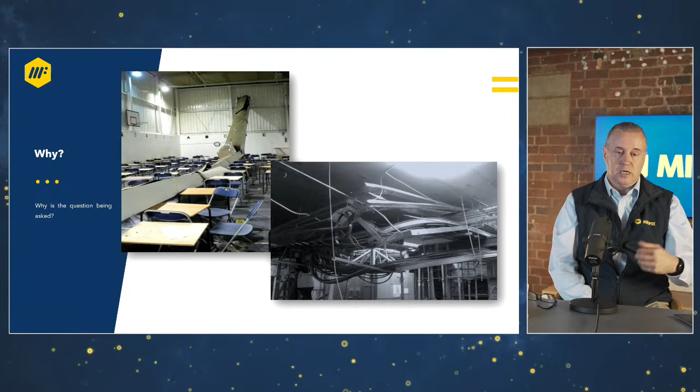There's a couple of images on the screen there that most of you would have seen before. There's a school hall with a ductwork collapse, a roofing collapse failure. Unfortunately, the image on the screen now was the Boston Big Dig. Following this particular incident in the States, anybody installing a resin had to be certified to install that resin.

And we've started with the fixings for one particular good reason. Usually, the fixing in a support and bracketry is your weakest point. It's the interface between the load and the substrate. And it's the fixing, as stated, that is usually the weakest point. So we're going to start with a fixing. How do we evidence that the fixing we've just installed can take the service load?

Well, thankfully, there is an answer for this, and it is under BS 8539. It came out in 2012. It covers many stakeholders. It covers people from the manufacturer of the anchor, the suppliers, the contractors, the installers, and the testers. We all have a part to play and some due diligence within the standards.

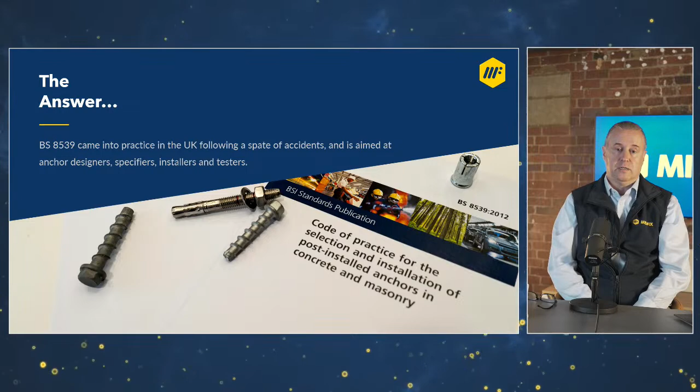There is also the TR50 document published by BESA, the Building Engineering Services Association. It's an excellent document and it breaks down BS 8539 into an easier to manage, sizable document. It also covers best practice for bracketry as well, because clearly the bracketry that is connected to the anchor is carrying the same service load. So that needs to be evidenced as well.

We've broken down BS 8539 into 4 hopefully manageable sections, because the one thing we need to do in our industry is keep things as simple as possible. The more complex we make a subject, the less chance of that actually being put through to the sites and actually working. So we've broken it down to 4 key areas. The selection process. How do we supply the anchor and the bracketry to site? The installation, and finally, if testing is required, how do we go about testing that particular fixing? So we're going to start with the selection process.

If I can start just by highlighting, traditionally within M&E, the selection process is usually carried out by the individual on site carrying out the install, and they normally fall back on past experience. So they'll look at the application that they've got to install, and then they will typically order anchors that they've always used, knowing that those anchors have never let them down in the past. Unfortunately, that's not a selection process within M&E. If we look at other industries where the selection process is far more stringent, such as the civils, the selection process is done well before the installation process, usually at design.

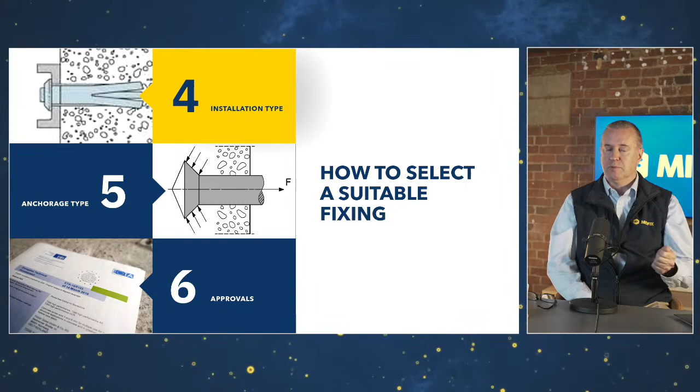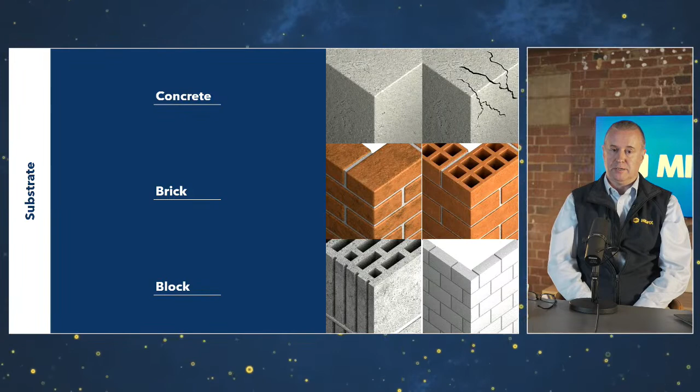So just touching on all of those points, BS 8539 only covers concrete and masonry and block of a certain density. It doesn't cover areas such as timber, steel, if you're looking at composite decking, for instance. But some of the principles within BS 8539 can actually be used to help us and give us guidance in things like cross-laminated timbers. Normally when we are fixing, we will be either fixing into a concrete substrate or a composite decking material.

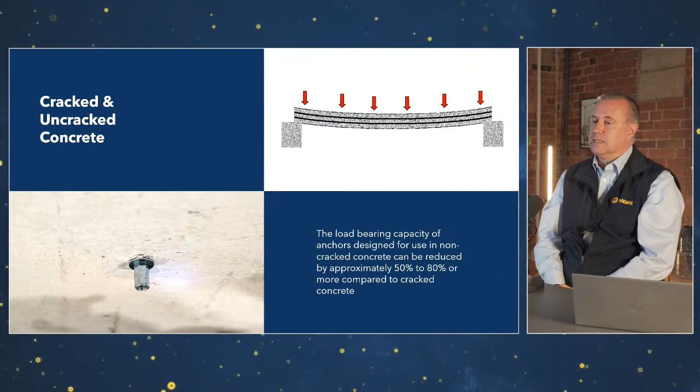But if it's a concrete substrate, the specifier has to understand the difference between cracked concrete and non-cracked concrete. And what does that actually mean? It's a question we always ask on site when we are carrying out some specification work, and usually the answer, is it cracked or non-cracked, is met with a shrug of the shoulders. I've no idea. Normally the structural engineer can tell us, but just to give you a brief as to what cracked concrete is, if we look at the image of the beam, the top of the beam is somebody's floor, underneath the beam somebody's ceiling, and don't forget that is traditionally where a lot of M&E applications will be hung from.

Concrete is a wonderful material. It's very, very good in compression, very poor in tension, hence the need for tension bars or reinforcing bars. But you'll see the beam is trying to deflect. The top of the beam is suffering from compression, not a problem normally in concrete. However, the bottom of the beam is actually in tension, which concrete is not very good at. And that's where you'll find most of the reinforcing bar. So typically if we're fixing up into the ceiling, a lot of the time reinforcing bar is found anywhere between 20 mil and 30 mil, because that's where the concrete is trying to deflect. That's where it's under tension.

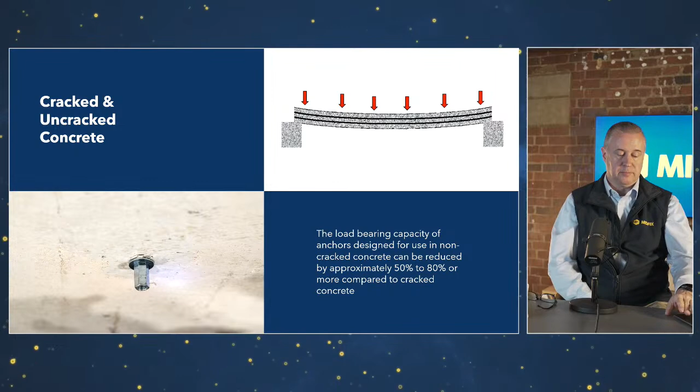That tension zone, it's probably a better term, is a cracked zone. And we have to select the correct anchors for that particular zone. Or should I say, the specifier needs to select the correct anchors for that zone. If we get it wrong and we select or specify an anchor that is not approved for cracked concrete, we could actually be losing up to 80% of the load carrying capacity of that anchor. Really important to remember. If we don't know, BS 8539 actually helps us and says if you can't ascertain whether it's cracked or non-cracked, you assume it's cracked. So we'll always assume the worst case scenario.

So number one, the substrate. We have to understand the substrate. The specifier has to understand the substrate. Number two, the loads. What load are we applying to the anchor? And the load is simply not 2 bits of 25mm copper and a bit of cable tray. It's an applied load, including any dynamics that could be added afterwards, such as cable pulling. We need to understand the loads that we will be applying to the bracketry, which in turn will transmit that load to the anchors. Very important to understand. Is it tension, is it shear, is it combined?

We have to understand that. Again, the specifier has to understand that. The specifier also needs to take into consideration for both anchors and bracketry the environment that they're being asked to work in. Normally, we work in nice dry environments. However, if we remove the walls and we create something like a multi-storey car park, we've changed the environment, and therefore we need to look at the finish of both anchor and support bracketry.

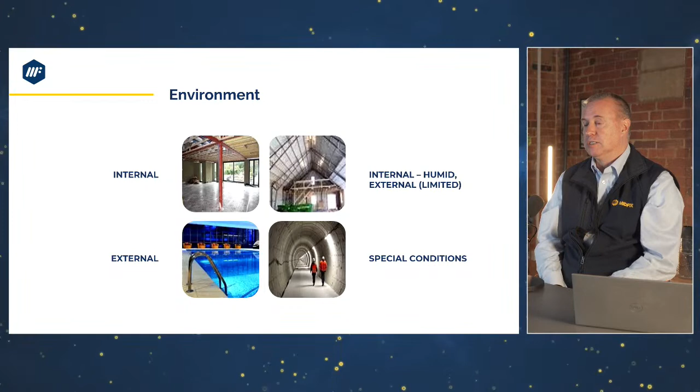There are certain areas like tunnelling and swimming pools. So swimming pools suffer from chlorinated environments, which can be very aggressive to certain finishes. So the specifier needs a strong understanding of the corrosive classifications as to where they are working. The types of installation, this is probably not so important for the specifier, but certainly important and needs to be kept in mind for the installation teams, because they will make the job easier or harder.

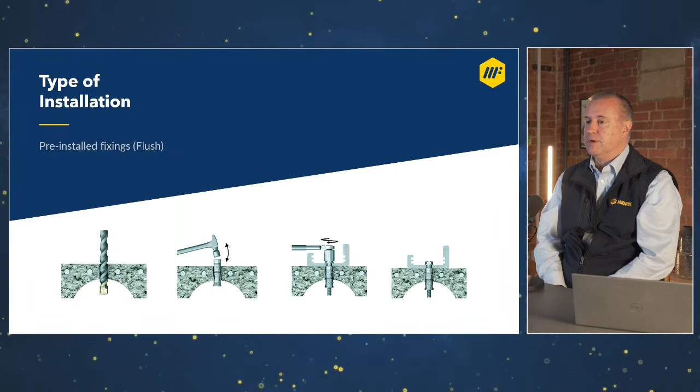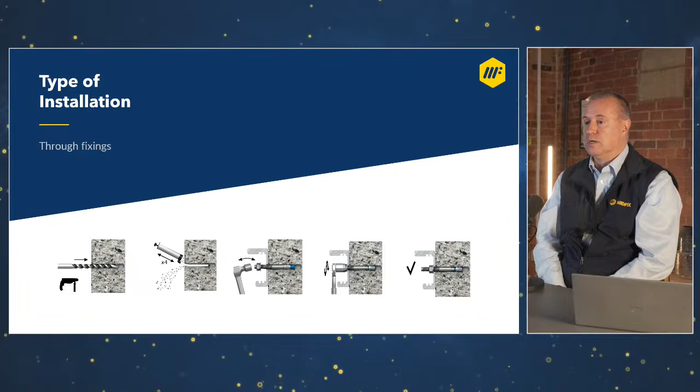The first type is a flush fix. A flush fix anchor is an anchor that needs to be pre-marked, pre-installed, and then the fixture can be offered over the top. It normally takes a little bit longer of an install because there is some setting out to be carried out with this type of anchor. The second type is a through fix anchor. As the name suggests, we can actually fix through the fixture straight into the substrate. And this normally, not all the time, but normally makes for a quicker install because marking out is not as critical. However, really important for the specifier to understand is how the anchor works.

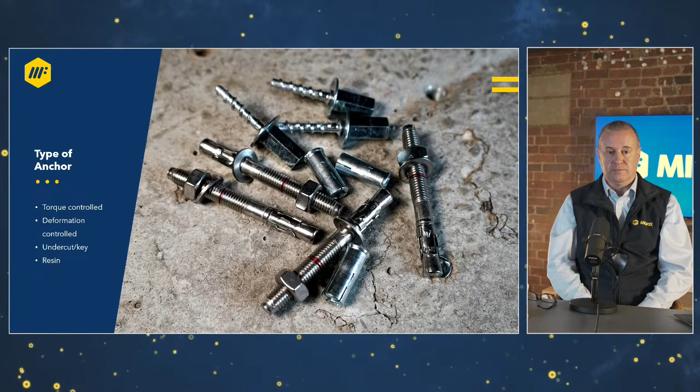All anchors work on either one or a combination of three basic principles. They either work on friction, interlocking or bonding. And those three principles cover all anchor applications. Friction means it's an expanding type of anchor, whether it's a deformation controlled, commonly known as a drop-in or a wedge anchor, or a through bolt, which is a torque controlled expanding anchor. These types of anchors impose a huge stress into the substrate.

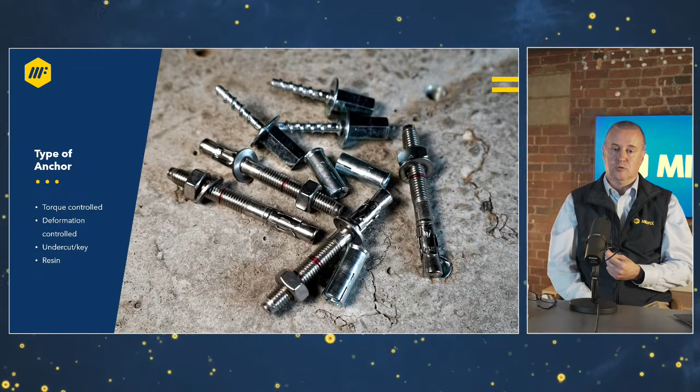Interlocking anchors, such as concrete screws, impose a much lower stress into the substrate. And resins are very similar to interlocking. Some resins work with a combination of bonding and interlocking, but they impose a smaller stress into the substrate. The stresses that we are imposing into the substrate create limitations. It means we can't place anchors very close together if they're a high stress anchor, or near the edge of slabs. Anchors that impose a stress into the substrate, so expanding type anchors, and obviously other types of anchors, create a cone of influence, and we need to be careful that we don't position the anchors too close together.

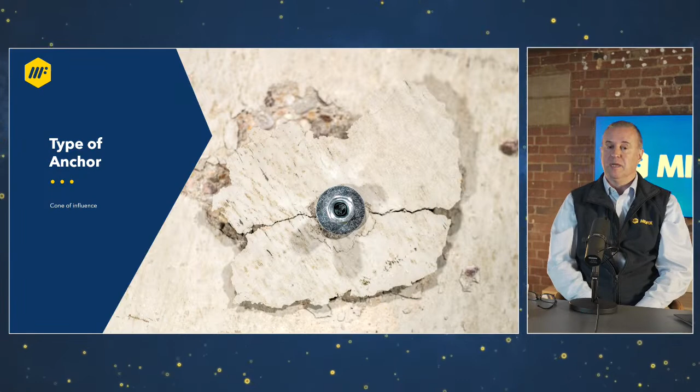If we look at the data sheets, and everything about this is about data, the specifier should have these at hand, it will tell you the minimum distances from each anchor and from the edge. If we go too close, there are reduction factors to be applied by the specifier, and indeed there is a limit as to how close we can go. There's an example on the screen of something that's quite common, which is a breakout failure of that slab. You see this quite often where we have base plates fixed down with through bolts, expanding type anchors, where there's 4 anchors far too close together.

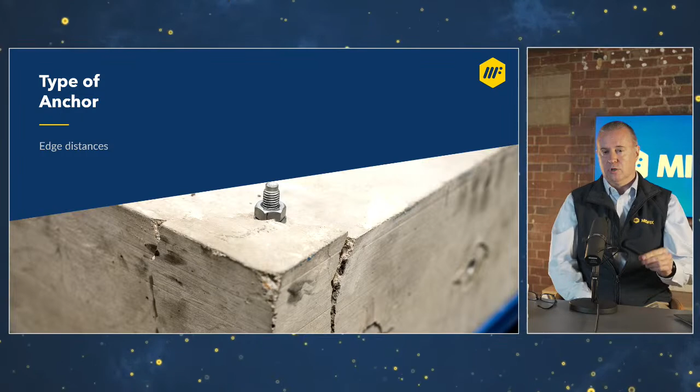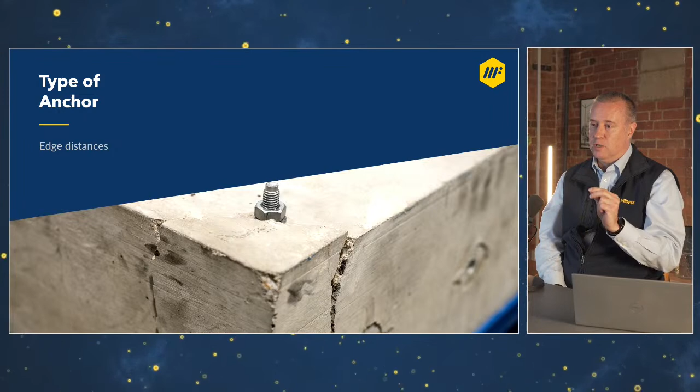The specifier should be looking at stressless types of anchors. They're not truly stressless, they do impose a stress into the substrate, but a concrete screw will put much less stress into the substrate than an expanding type anchor. So the specifier needs to understand the 3 basic principles, interlocking, friction and bonding, how they work and how they affect the substrate, because that will limit which anchor we can use in which application.

The final bit of due diligence that the specifier needs to understand is the approvals. So what does BS 8539 tell us? Well, BS 8539 is quite clear on this. It tells us if an ETA approved anchor is available, it should be used. And an ETA is a European Technical Assessment. It's where the anchor manufacturer sends their anchors away for independent testing, and the testing is carried out to a harmonised set of standards. So we can actually compare like for like when we're looking at different anchor manufacturers.

But for the specifier, the ETA sheet gives us the information required in order for us to understand the resistance that that anchor will give us in a known substrate. Without that information, it makes the specification process, I won't say impossible, but extremely difficult. So BS 8539, very straightforward. If an ETA anchor is available, it should be used.

Now, there is a good reason why there are quite a few non-ETA approved anchors on the marketplace, and it's for commercial reasons, because the ETA process is an extremely expensive process. But without the data that the ETA data sheet gives you, it makes it, as I've said before, extremely hard to specify. So that's crucial. And that ETA data sheet is part of the evidence. So if we look at all the due diligence that's gone on there, that all forms part of the chain to evidence that the anchor is actually fit for purpose.

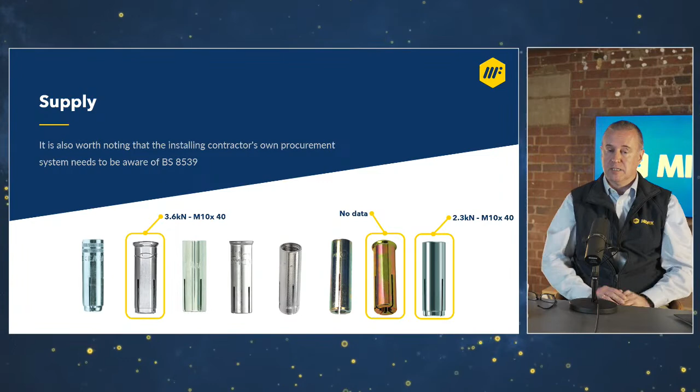But there's 8 on the screen. All 8 have different recommended loads. This actually highlights one area as to why anchors don't collapse on a daily basis. We've painted a very dire picture about anchor failures, but the truth is, yes, anchors themselves don't actually fail, but structures come down, so to say supports come down on a regular basis. It's usually because they have been installed incorrectly.

However, if we look at the anchors that are on the screens, within M&E, our applied loads tend to be quite low. And if you look at the anchor that's highlighted there, one of them has a recommended load in excess of 3 kilonewtons, which is quite a hefty load. Most of our loads won't be anywhere near that. So even if this anchor is selected wrong and installed incorrectly, the chances are the anchor will still take that applied load because the safety factors are huge behind these anchors. 3.6 kilonewtons is a recommended load, not a failure load. The failure load is extremely high. So the anchor will still work.

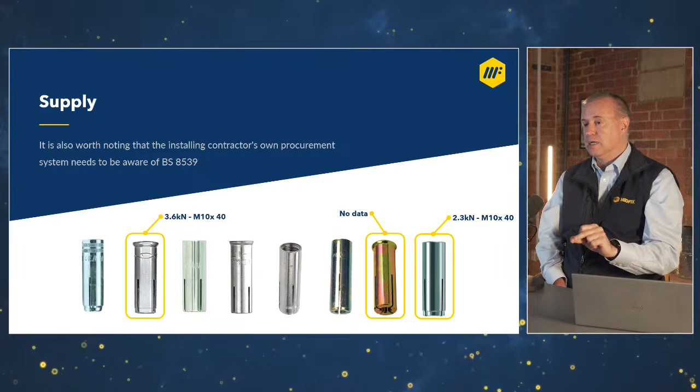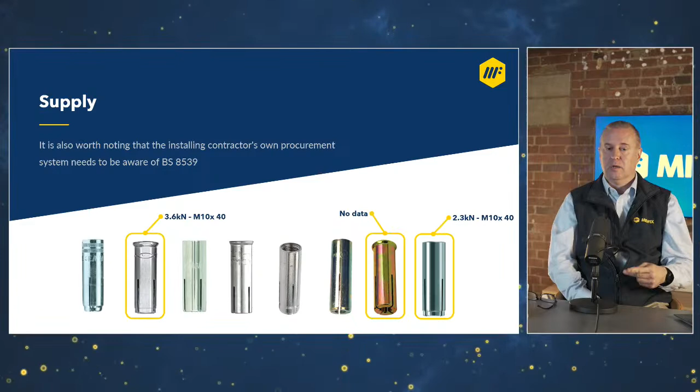But the truth of the fact is, should anything happen, we've broken the specification because we haven't provided the anchor that was specified, it hasn't been installed correctly, and worst of all, if we've changed the anchor that's been specified, we haven't followed the correct change management process. And this is important, again, not because of failure, but because of the ability to prove your install. If we install the anchors that you've specified, if we install them correctly, then we can realise the recommended loads of those anchors. Without proof that the anchor's been selected right and installed right, you won't realise the recommended load of that anchor, which is the proof.

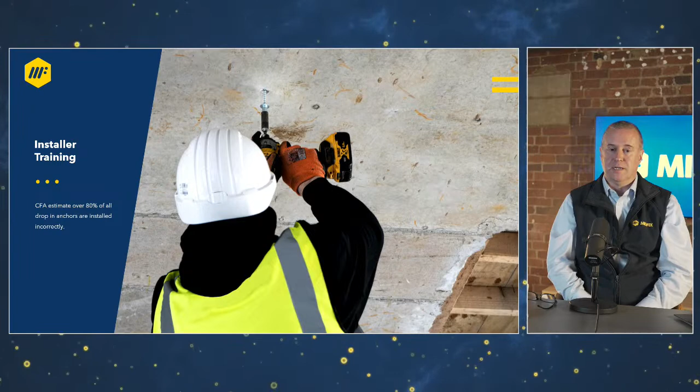The install is the biggest variable in all of this. The installer is 9 times out of 10 the main reason why installations, both anchors and bracketry, actually fail. It's a lack of understanding of the fundamental basics of that particular type of anchor. And BS 8539 again helps us out with this. It's training and a bit more training. There's 2 types of training, installer training and supervisor training.

Installer training, in essence, is the easiest bit. We can capture that in one simple sentence. Install the anchor to the manufacturer's instructions. An ETA approved anchor will have all the information on the box required to install that anchor correctly.

It will give you the drill diameter and depth. It will tell you nine times out of ten to clean the hole out. It will give you the setting tool requirements for that anchor. It will tell you the torque requirements for that anchor. And torque is a really important and critical term here, and we will have a further slide on torque, but just keep it in the back of your mind. And it will also tell you the loads that that particular anchor can take.

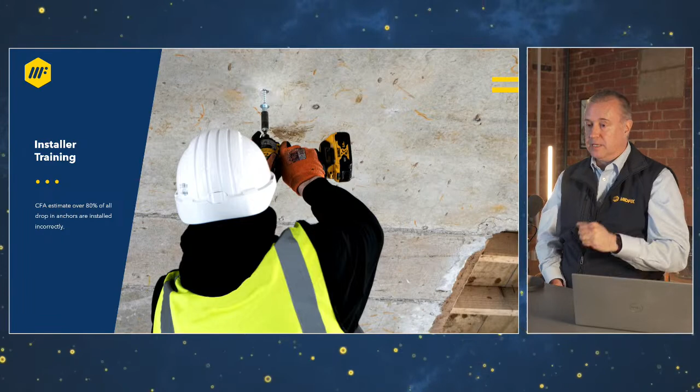But for the installer, the instructions are on the box. The drill diameter and depth as mentioned, how to install the anchor, clean the hole out, the setting tools that are required. It's all on the box. But training is absolutely everything. Now, as a worst case scenario, a toolbox talk is better than nothing. So whichever anchor you've chosen to specify, get your installation teams trained on how to install them.

There's an estimate out there that for drop-in anchors over 80% are actually installed incorrectly. Personally, I think that figure is wrong. It's more like 95% are installed incorrectly for a couple of good reasons. First and foremost, the correct setting tool is not used. Most people will use a generic setting tool. Well, there isn't a generic setting tool for drop-in anchors. They are manufacturer and size dependent.

And the other bit, and again, this is required to be able to evidence and realise the load data, even for a drop-in anchor, on the installation instructions, an ETA approved one will tell you a maximum torque. Well, why do we need a torque for a drop-in anchor when they are controlled by striking a setting tool with a hammer? Well, the torque is there for the set screw or the locking nut that we apply to that anchor, and you'll find it's quite a low torque on most manufacturers' set screws. If we over torque them, in essence what we're doing is we are pulling the anchor out of the substrate, and therefore we're not realising the full load that that anchor can actually take.

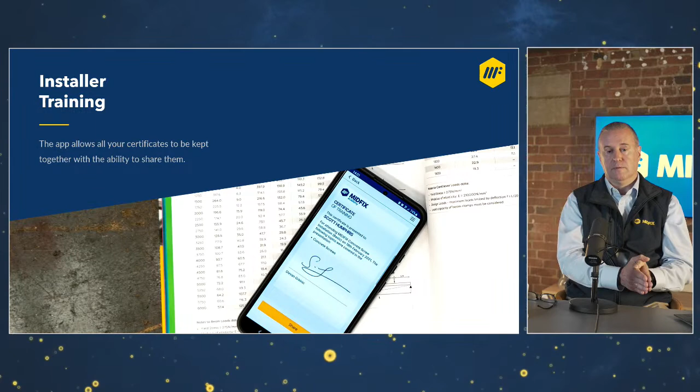Finally, the testing. We often get asked to carry out testing on site. It's normally called a pull test. It's not the correct terminology, but that's how the industry recognises it, as a pull test. BS 8539 actually tells us that if we've installed an ETA approved anchor into a known substrate and it's done under trained supervision, i.e. the supervisor, with trained installers, there is absolutely no need to carry out a proof test.

And that makes quite a lot of sense if you think about it. The anchor has gone through a very expensive and rigorous ETA process. There is no way that that testing process can be replicated on site. So a proof test isn't required, but normally one of those elements is missing. Either the training competencies of the installation teams or the supervisor. The substrate might be unknown as well. If we don't know the design strength, then we have to carry out testing.

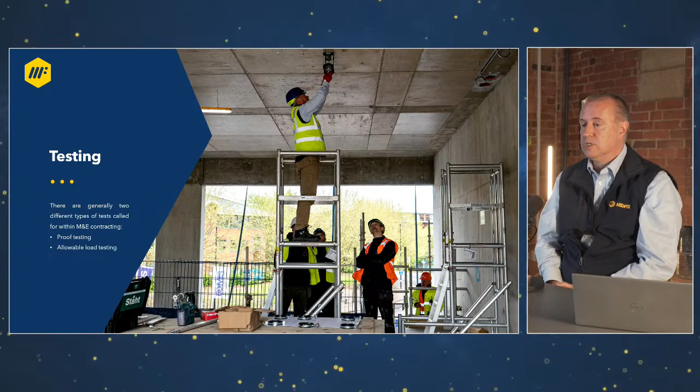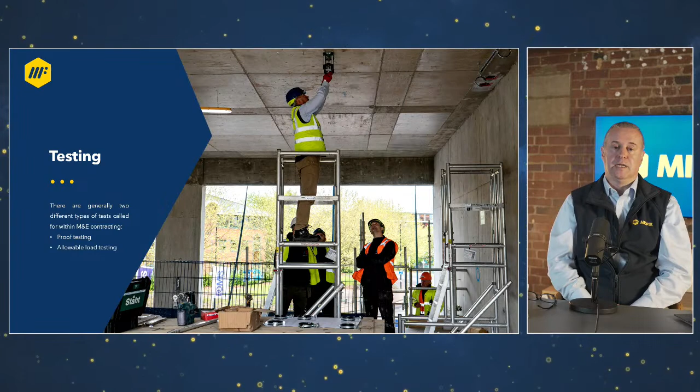But there's 2 types of testing. There's a proof test, which is probably the most common type of testing. This is when we attend site to anchors that are already installed and we just prove their installation. That's all it does. It proves it's been installed and it reaches a test load. It doesn't actually tell us that the anchor's been selected correctly in the first place, but it does prove it's been installed and it does reach a test load.

Normally that test load is only 1.5 times a recommended load, and there's a reason for that. It's because that anchor is being left in service. If we go above the design load, then we need to remove that anchor from service. But a proof test is just a test that proves this anchor in this particular application has been installed correctly.

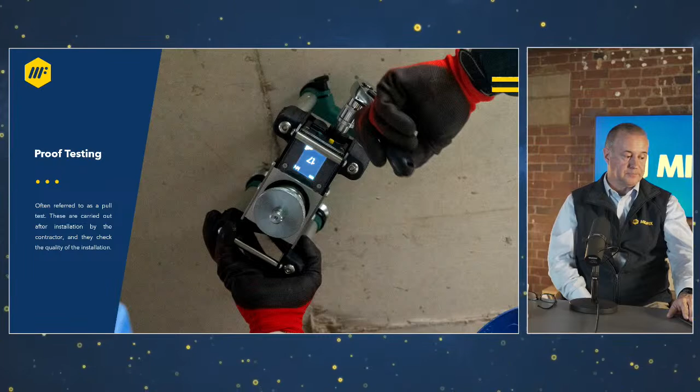If there's an element of the ETA that's missing, then we need to carry out allowable load testing. Just move on to that one. Allowable load testing is a little bit more rigorous. It requires a different type of card for the operator to carry. One thing to bear in mind, anybody carrying out testing for you or on your behalf needs to hold a CFA, Construction Fixings Association, tester card. A general card is required for proof testing, and an advanced card is required for allowable load testing.

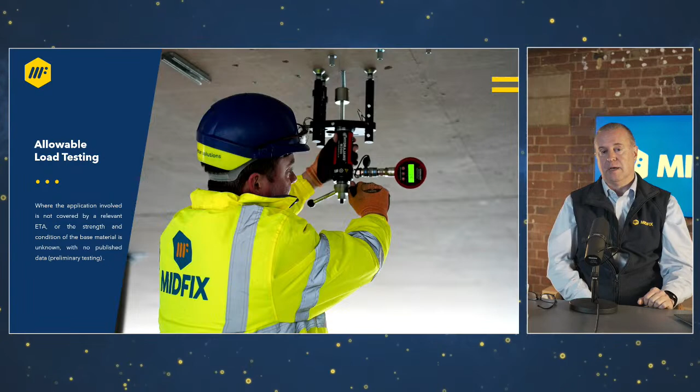But allowable load testing is only specific for that particular site, that particular fixing. It's usually for when we have an element of the ETA missing, such as it's an old building and we don't know the design strength. We then carry out allowable load testing to find out the suitability of that anchor in that application only. Whereas an ETA in a known substrate can be transferred from site to site, allowable load testing is fixed on that particular application. And if the substrates vary, we may have to carry out more than 1 or 2 allowable load tests.

So that's testing. We've broken it down, BS 8539, into the selection process. Don't forget, whoever makes that selection is the specifier, and they're the first port of call should something go wrong. The supply of that, and a lot of the times, whoever's changing that supply, for whatever reason, could be commercial, it could be availability, they become the specifier if they change that anchor.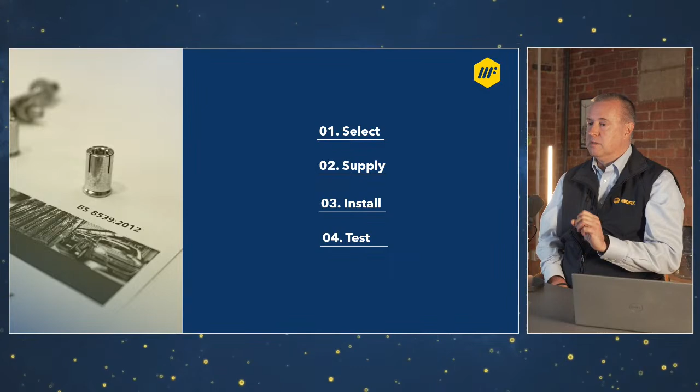The install, the biggest variable, that's where it's going to go wrong. That's where issues occur. Anchors themselves very, very rarely fail. Things come down a lot of the time because they've been installed incorrectly, or they were selected wrong in the first place, which means they're not given the opportunity to perform. But the vast majority of the time, they've not been installed correctly.

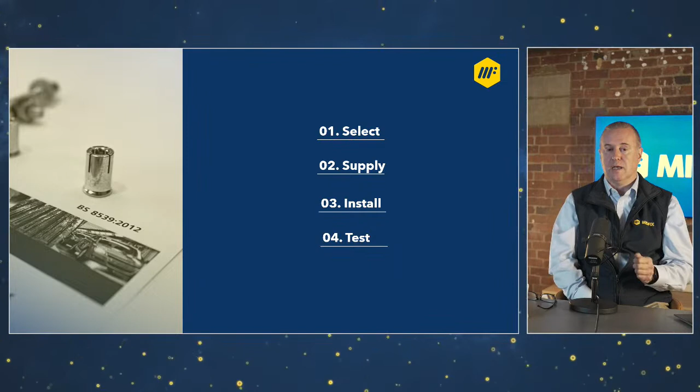And some of that is down to the value we place behind anchors. Because they are a commodity item, there's not much thought gone into it. If there's not much thought gone into the selection process, it usually means there's very little, if any, thought in the installation process. But anchors are installation critical. And finally, the testing. Just bear the testing in mind. Proof testing only tells you that that anchor has been installed correctly. It doesn't tell you anything else.

We then need to apply the same principles to the bracketry that's under the anchor, that the anchor's supporting, because the bracketry is carrying the same load that it's actually transferring to the anchor. And how do we carry out this proof? How do we evidence that the bracket is capable of taking that same service load? Well, that's to use a tested channel system.

But this is only one point. If the channel can take a load, let's say a worst case point load of 100 kilos, we need to understand that any joint connection can also take that load or more. So a tested system is critical. When we procure channel from just a channel supplier, 9 times out of 10 we are given a load table with that as well. But the channel itself, the load bearer, is tested as a simple beam. So the maximum deflection they give you is tested on 2 rollers with a deflection applied. It's not tested with any form of connection.

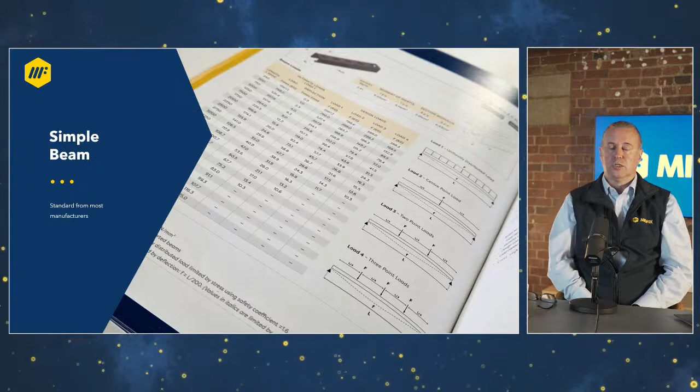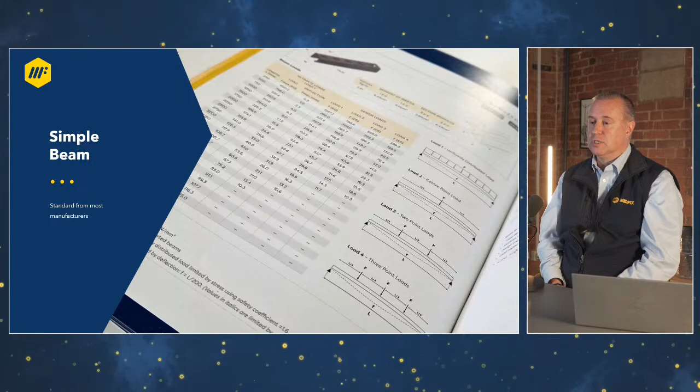As soon as we've connected to that piece of channel with either a channel-to-channel connection or a threaded rod connection, that load data is lost. And it's quite clear why. The manufacturers of that channel cannot possibly test for all end applications. And this is where a tested channel system comes into its own, because the connections are actually provable as well.

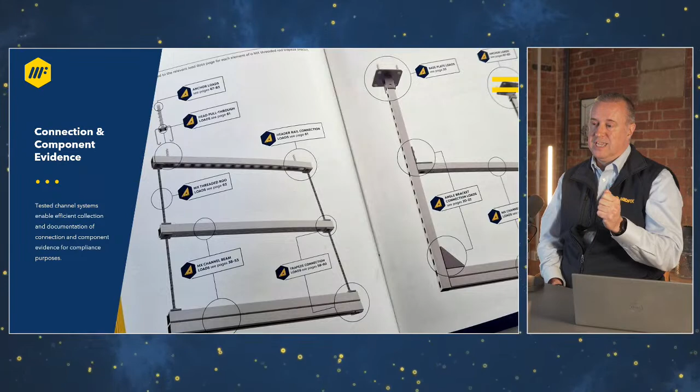So if we look at the image now, typically a lot of the time we work with trapeze brackets to carry the services around buildings, whether that's on threaded rod or channel. And obviously the channel trapeze there, if you invert that, you've got a goalpost. The same rules apply. But every connection on that trapeze needs to be provable. That's including the tensile load on the threaded rod. The threaded rod connection to the channel needs to be provable as well. Otherwise, the load data for the actual channel itself is null and void.

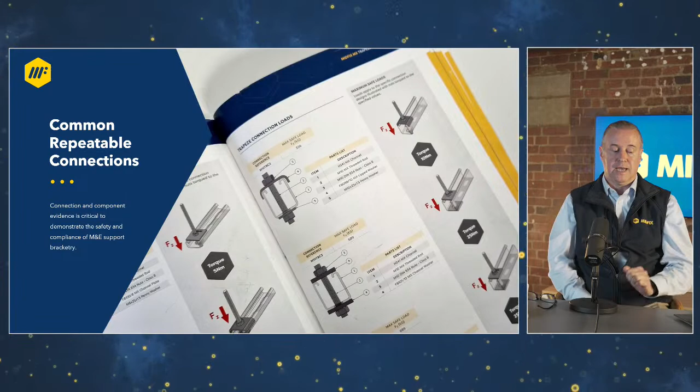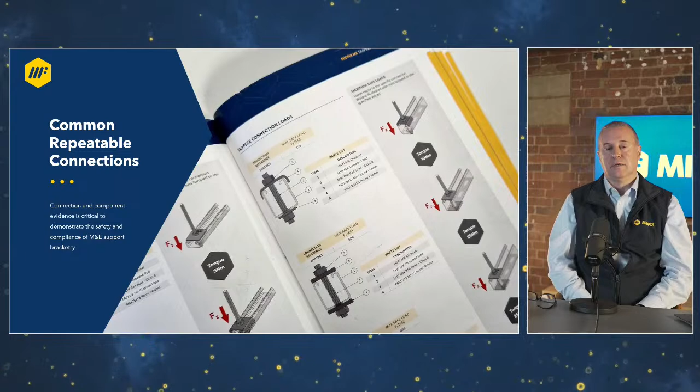That joint has to be repeatable. In order to do that, it's got to be built correctly. In order to do that, it needs an installer with a torque wrench to build it as per the manufacturer's instructions, and that will release the load and the warranty. But the training behind it is as critical as the training behind the anchors. You've selected a tested channel system. Don't miss out training the installers. That's your final piece of the jigsaw. That closes the circle and proves that you've used the tested channel system, which means you can evidence the load. And finally, they've been installed by people who are aware of how to make that connection.

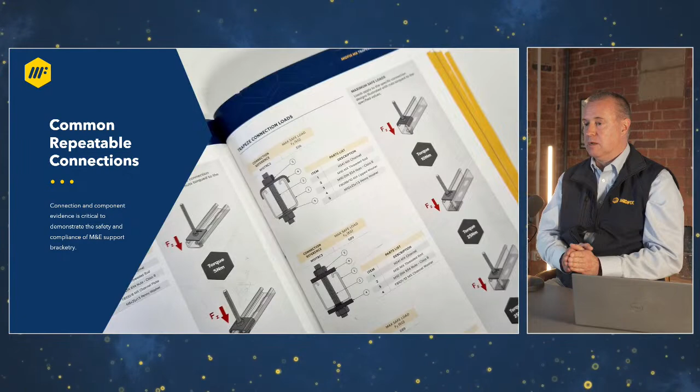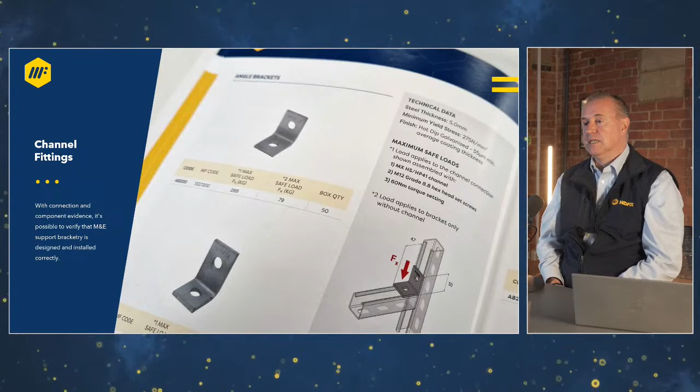That releases the data. And you can see an image there of a humble angle bracket. If it is torqued correctly, it will achieve a load in slip and in tension. Same as cantilever arms. Cantilever arms with a tested system will show you a uniform load, a centre point, and then a worst case fulcrum load. So your site teams have all the information required not to overload that particular cantilever arm or the channel length. And as mentioned before, it releases one of two things when built correctly. Most importantly, it releases that load information.

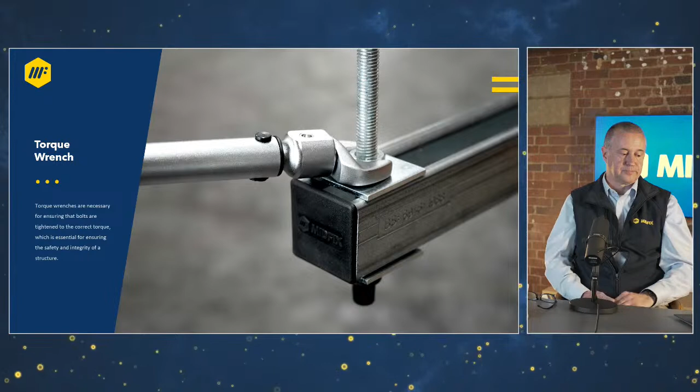And that's my final point, the torque wrench. This should be a standard staple diet for any installer in the building services industry, for anchors and for bracketry. Without a torque wrench, we can't install a through bolt. Without a torque wrench, we can't connect to a drop-in anchor. Without understanding the torque requirements of a concrete screw, we can't install it correctly.

Without a torque wrench, we can't build a repeatable, provable joint on a tested channel system. They're not expensive, but they're part of a training package. Traditionally, we've never used them in our industry. Moving forward, where the evidence is required, we will have to use them in our industry. It's the evidence that's required.

The product and the individual. Bring these two items both together, and that gives us our golden thread of information to say the bracket and the fixings that I've just installed are capable of taking the service load that we've just applied. So I've sped through it fairly quickly.